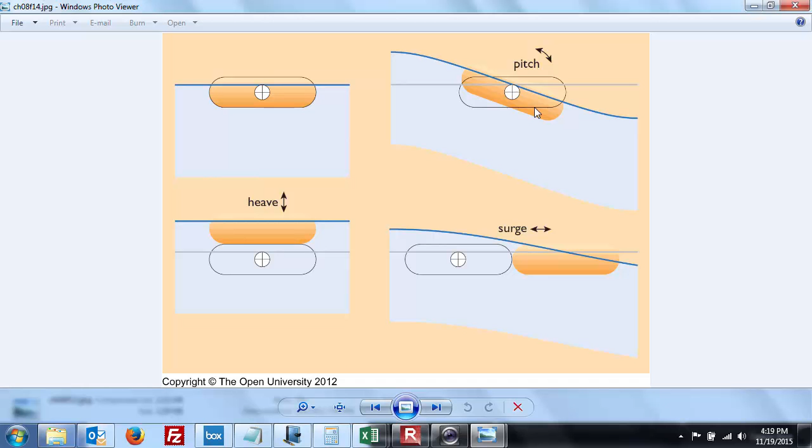They're mutually perpendicular, and you can see that little buoy can do one of them, the other one, a combination of two, a combination of all three, and each one of them is going to give you some energy if you have a generator attached to it. Very similar to the technologies I was talking about before with the roadway energy harvesting. You can have something sliding back and forth, moving up and down, spinning in a circle, what have you. Just something to think about in terms of energy harvesting.

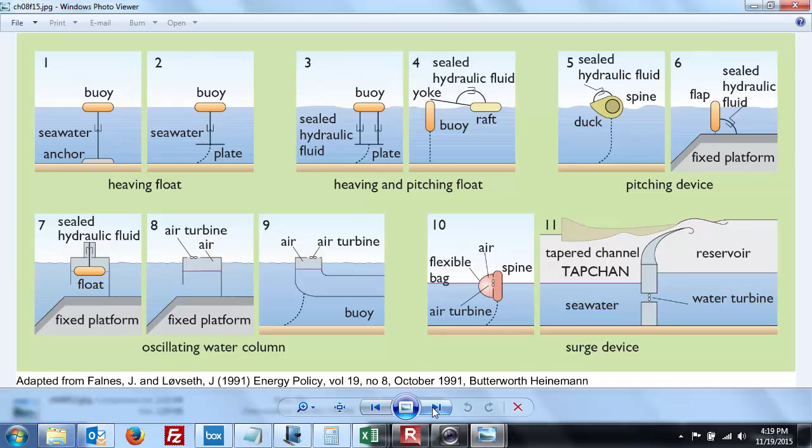Okay, so here are several different types of wave energy converters. Each one of them is using some combination of heaving, surging, rotation. Sometimes it's just water-based. You can also see the tapered channel that we discussed before. Some of them have a flexible bag, so you have air, just like in that air-water channel that we looked at last time. Okay, so that was it for that set.

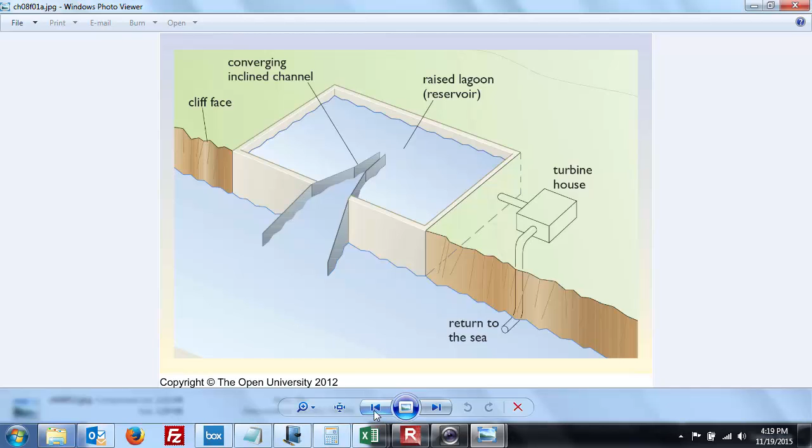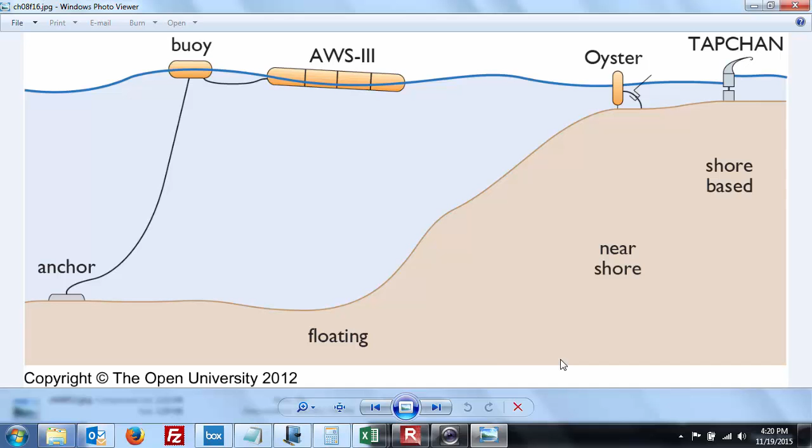If you're too close to shore, it could get beat up, unless you've got this neat little thing called the Oyster there. You can see it's just sort of taking advantage of a rotational motion. So, most of these general strategies have been fairly well thought out. Okay. And again, these are just kind of cartoons showing different modes through which energy can be harvested.

The technology itself really does not have any moving parts. It's more or less a piezoelectric material. I shouldn't say no moving parts, just very small vibrating parts. Well, big parts that vibrate a small distance, in a similar way to how a microphone or a speaker works in your car. So in a microphone, you speak, something vibrates, that mechanical vibration is then turned into electrical energy. So I, in fact, know somebody quite well who's working on this exact technology.

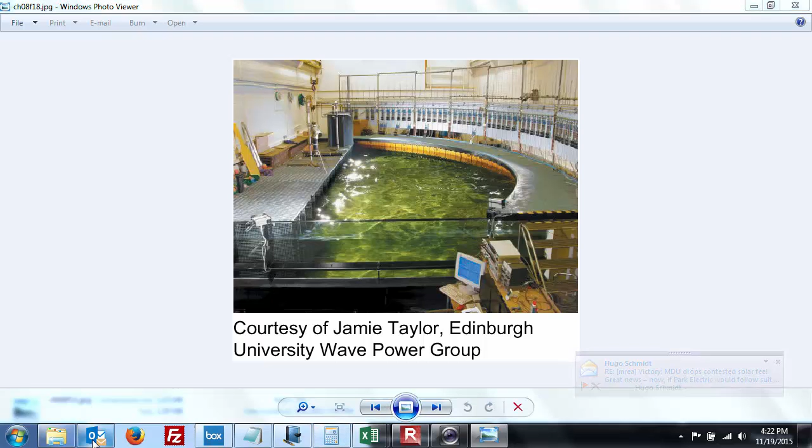Okay. Here's a shot, wave tank. So a way to do testing of devices. So rather than go to the expense of running your tech all the way out in the ocean, just head over here to Edinburgh and run the wave tank. Make sure you're getting the data you want, and then you can deploy it out in the ocean. Similar to what you'd see with a wind tunnel. If you're going to build an airplane, you'd put it in a wind tunnel first.

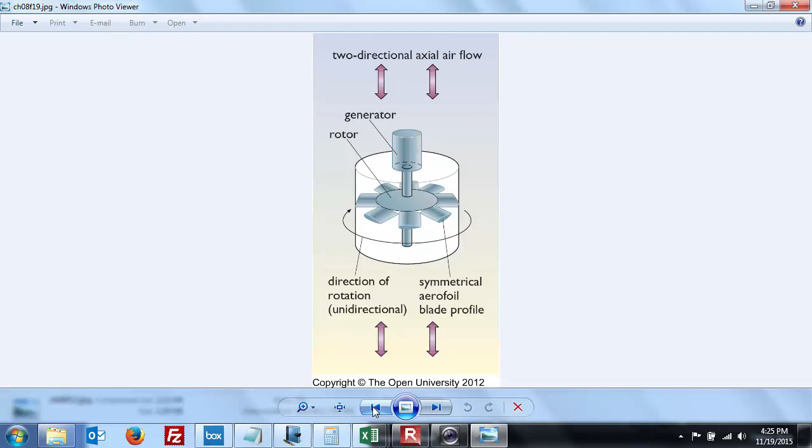So you can see when you add your vectors together, there goes the drag. The lift is actually pointing forward, and it's the lift that makes the whole thing rotate. So that's how it works. You could flip it upside down and it would still work just fine. So you might look at this thing at first glance and go, it's never going to work, never going to turn. But do your physics. There it is. Watch it spin, and here comes your electricity.

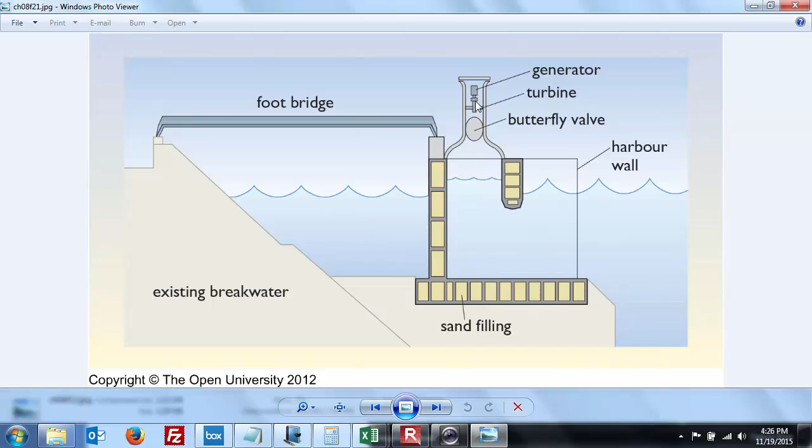Okay. So here's an example of how something like this might work. The butterfly valve is either going to be open as it is now to let the air go through, or closed in order to build up pressure. So you could imagine building up a big head of pressure and then let it blast open. But the point is, as the water comes in and out, the air column itself is pressurized, depressurized, back and forth. The turbine spins, and you make electricity. And here's just another shot of that.

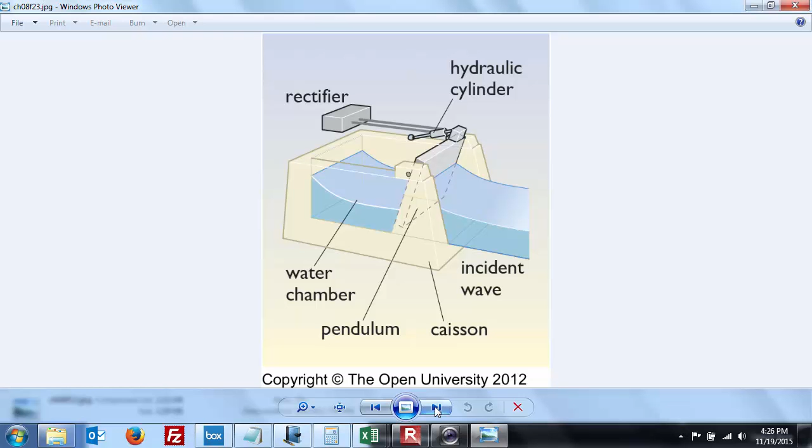Okay. You've all heard of a rectifier in an electric circuit that turns an AC signal into a DC signal. Same basic principle here. This is just a mechanical rectifier that is turning the oscillating water chamber and the waves coming in into a constant output.

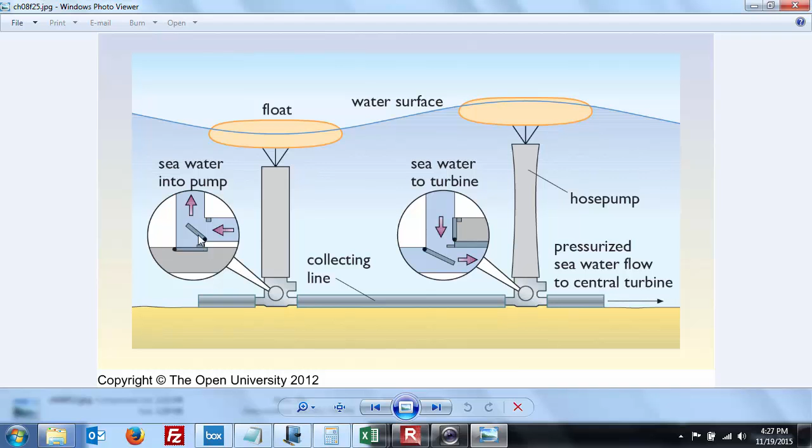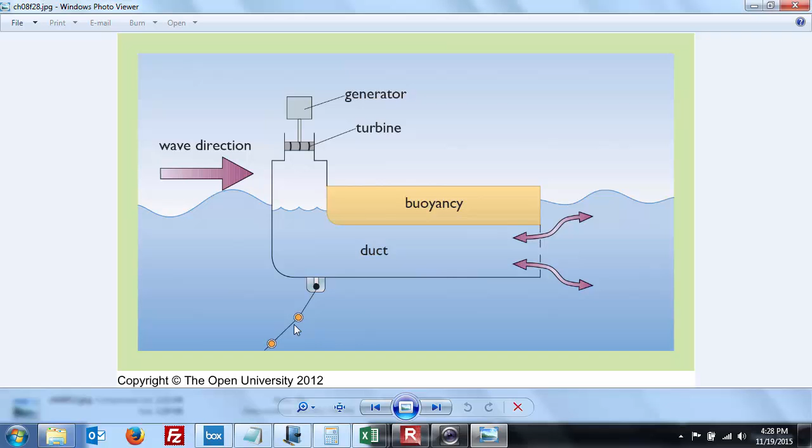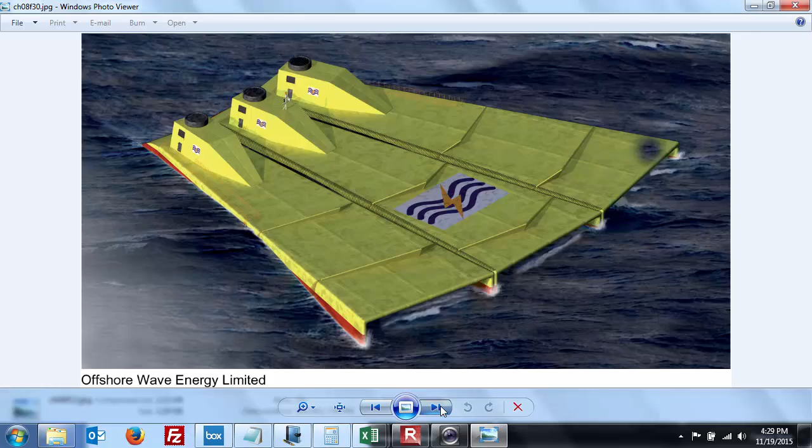And the rest of these are sort of larger technologies, and if you remember earlier in the chapter, the authors were saying how when the oil energy price shocks of the 70s were a big deal, these were much more economically favorable. We just did the same kind of argument with our beetle kill project, where how do you compete with coal? Well, you have to have some other product so that it becomes economically competitive and not just environmentally sound. Another floating technology. There's one that's just rotating.

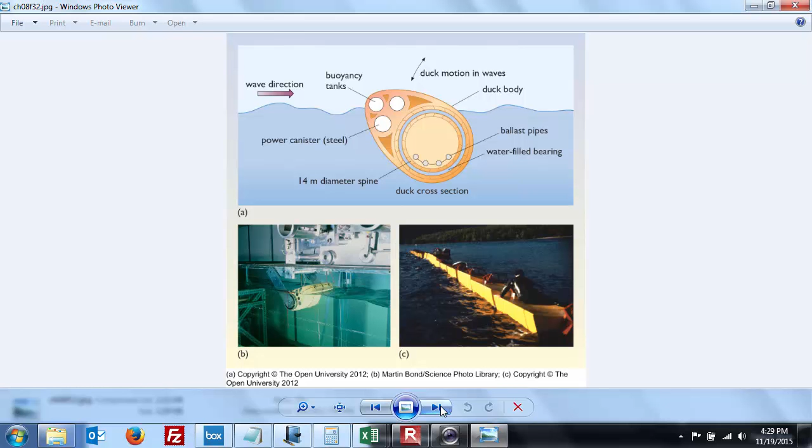This is another pretty cool one too. I have seen much larger versions of this to try to kill hurricanes. So imagine something like this sitting out in the middle of the ocean that is capturing small waves as they build up, and you never get that big wave. And so rather than having the giant hurricane waves come sloshing into New Orleans or New York City, you pop one of these guys out in the ocean, waves come in over the edge, and then as the water flows out, you harvest the energy through a generator. So this is kind of a small one, but there have been proposals for much larger systems. So you're not only harvesting energy, but you're mitigating potential storm damage.

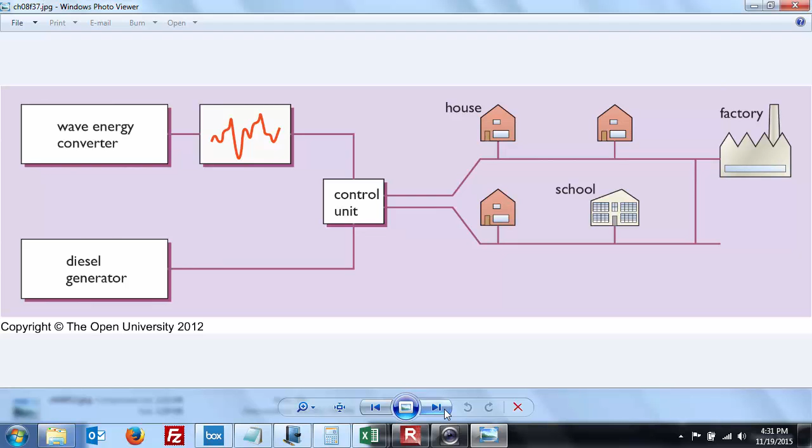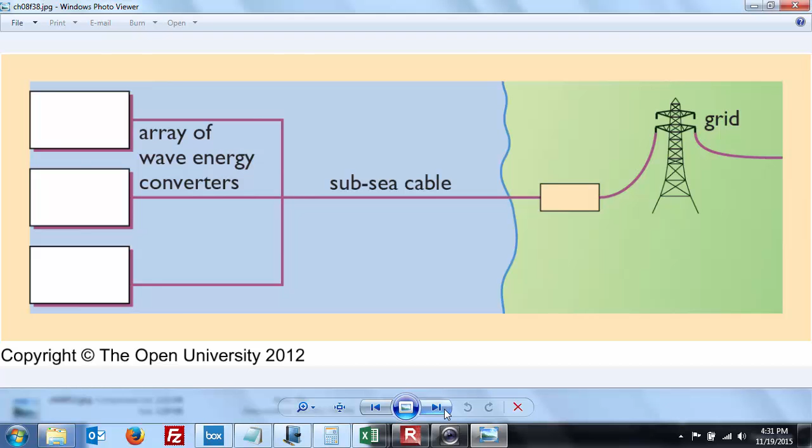This is another one, kind of a barrier. This guy just works by rotating back and forth. This one you can actually pilot around, go where the waves are. Okay. Well, I just want to wrap that up. There's a little deal on what this looks like with the grid tie. So you might have your diesel generator as a backup. Much bigger grid scale. So there's obviously been some good engineering done on this.